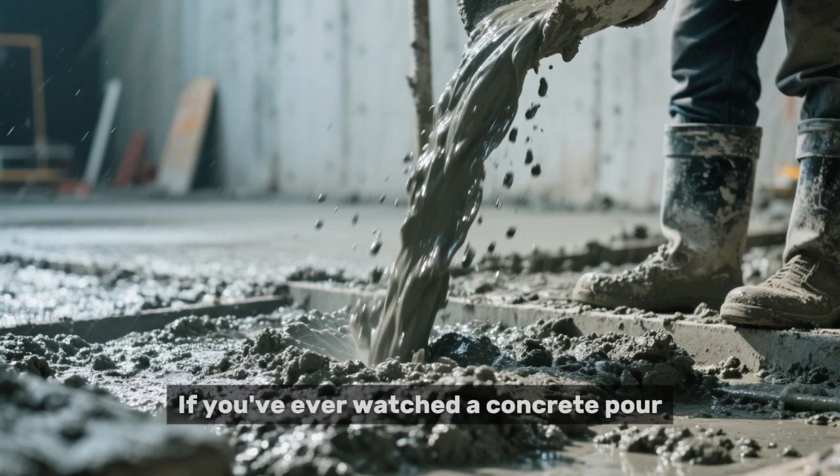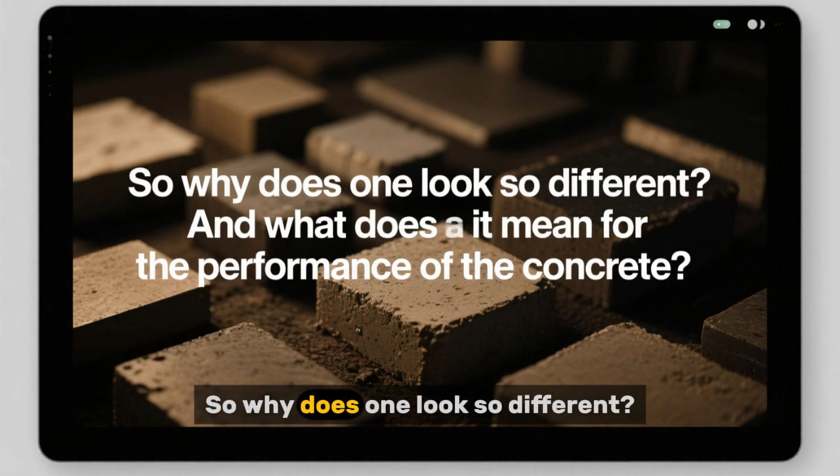If you've ever watched a concrete pour, you'd probably notice that some concrete looks like wet cement and others appears dry. But they're both at the same water to cement ratio. So why does one look so different? And what does it mean for the performance of the concrete?

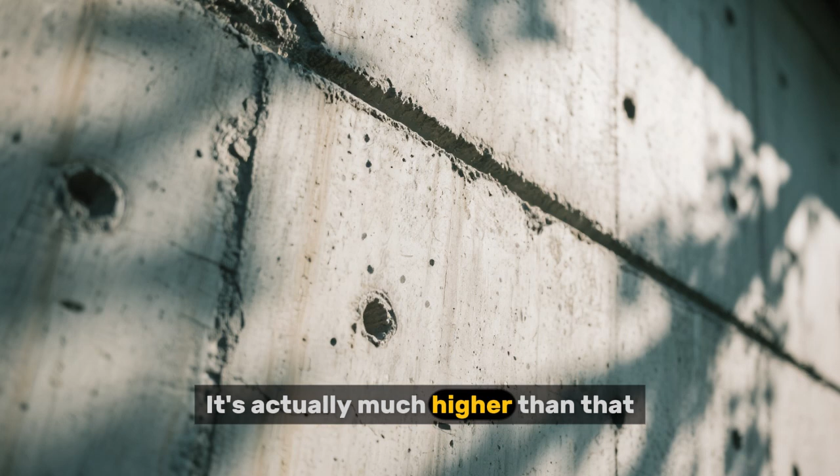I'm here to talk about the science behind concrete curing, which is something that I don't think people really understand very well. I've been involved with many projects where there's been problems with concrete, particularly with regard to cracking. And when you ask the contractor what was the water to cement ratio, they'll always say, oh, it was 0.45 or whatever it is, the typical ratio. But then you look at the concrete and it's clear that that's not the case. It's actually much higher than that. They just didn't understand it.

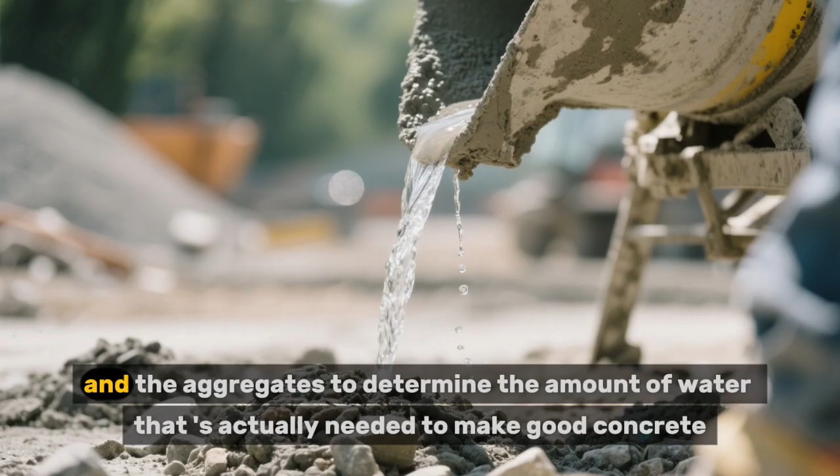And so it's important to understand the water to cement ratio, but also how that water reacts with the cement and the aggregates to determine the amount of water that's actually needed to make good concrete. Concrete without enough water will be difficult to place and finish properly. Too little water can lead to poor workability, segregation, and insufficient consolidation. On the other hand, too much water reduces strength and durability and increases the potential for cracking. Achieving the right balance between these extremes requires some understanding of concrete science and a whole lot of experience.

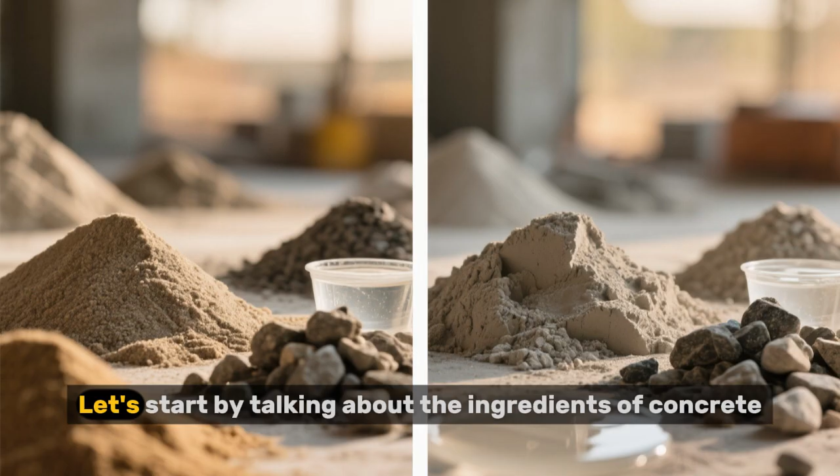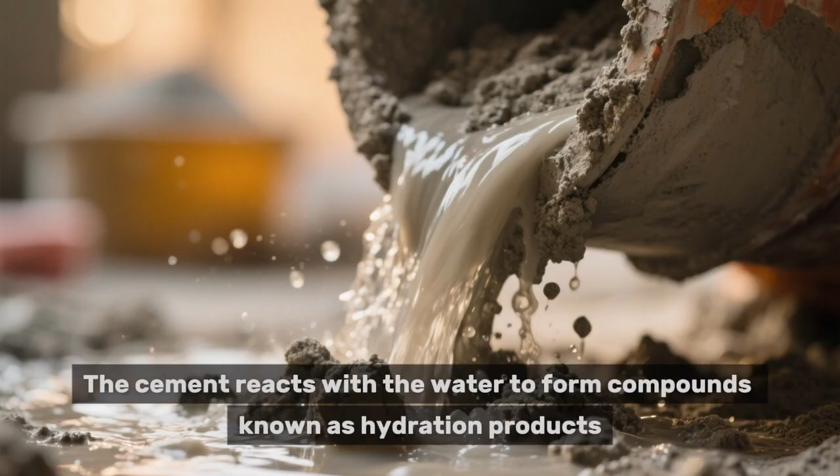Let's start by talking about the ingredients of concrete. Concrete is made up of 4 main ingredients: cement, water, aggregates (sand and gravel), and air. In order to make concrete, you mix all these ingredients together, and then once it's placed, a series of chemical reactions take place. The cement reacts with the water to form compounds known as hydration products. These products are responsible for the strength of the concrete.

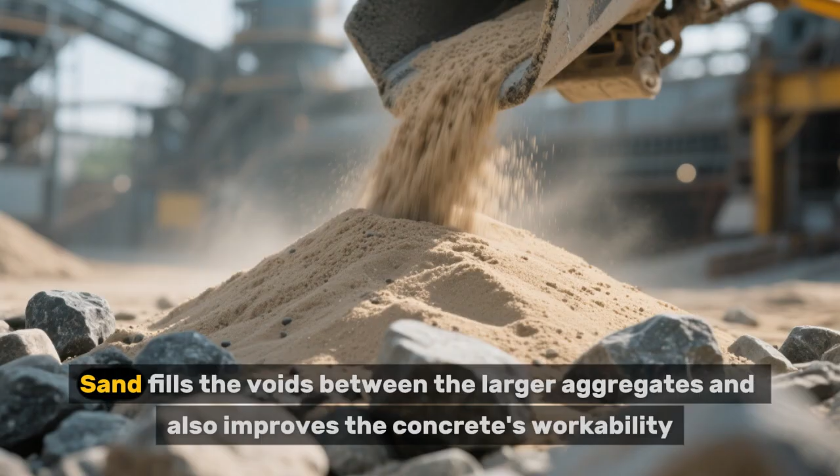The aggregate provides the bulk of the concrete's volume, and its porous structure allows water and air to be held within the concrete. Sand fills the voids between the larger aggregates and also improves the concrete's workability. Air is typically considered an impurity in concrete, but actually concrete without air is extremely brittle and is more likely to crack. The air bubbles within the concrete absorb some of the energy from applied loads and also allow for some movement within the concrete as it dries and shrinks.

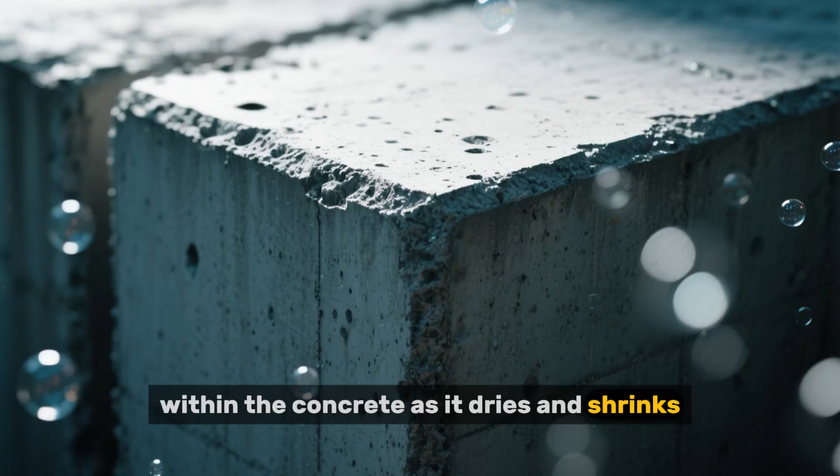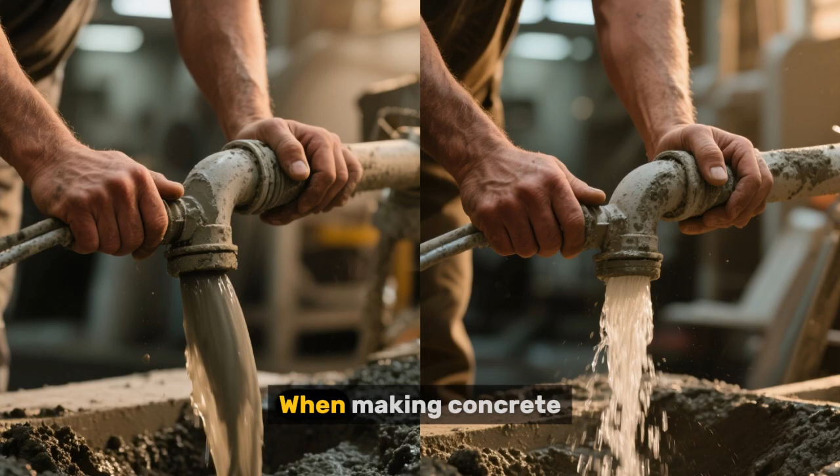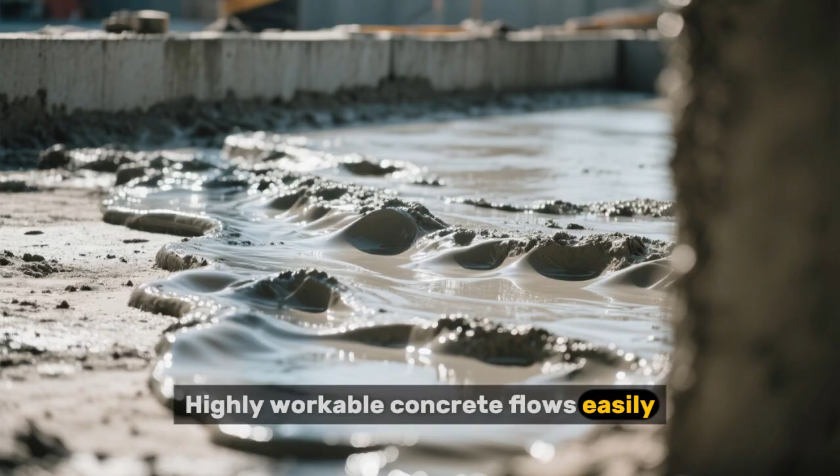One of the most important properties of concrete is its water to cement ratio, often abbreviated as W/C ratio. The W/C ratio is the ratio of the amount of water to the amount of cement in concrete. This ratio affects many of the properties of hardened concrete, including strength, durability, and appearance. When making concrete, you need to find the minimum amount of water necessary to make the concrete workable. Workability refers to a concrete's consistency or plasticity. Highly workable concrete flows easily and can be placed in congested areas with tight formwork. Less workable concrete is stiff and difficult to place.

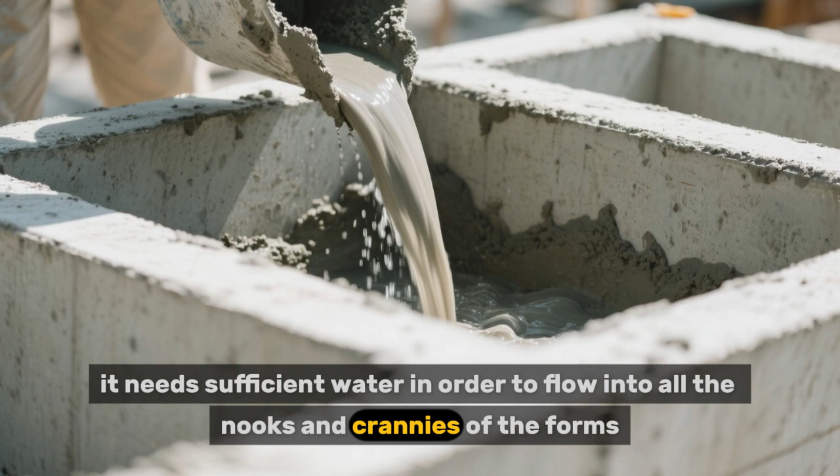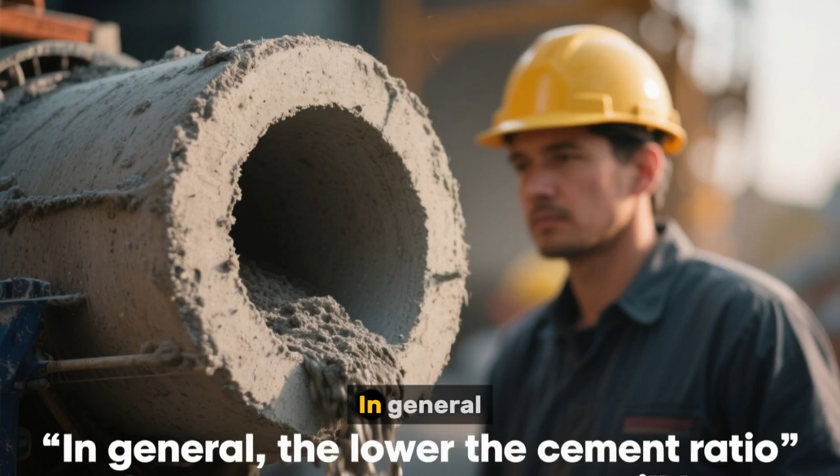Because concrete is a fluid when it's first mixed, it needs sufficient water in order to flow into all the nooks and crannies of the forms. If there isn't enough water, the concrete won't fill the forms completely and will be subject to segregation and may not consolidate around the reinforcement. The ideal concrete has just enough water to reach the furthest reaches of the forms and bind all the ingredients together. In general, the lower the water to cement ratio, the stronger the concrete will be. This is because the strength of concrete comes from the interlocking hydration products of the cement. With less water, there will be more cement available to react and produce a denser, stronger matrix.

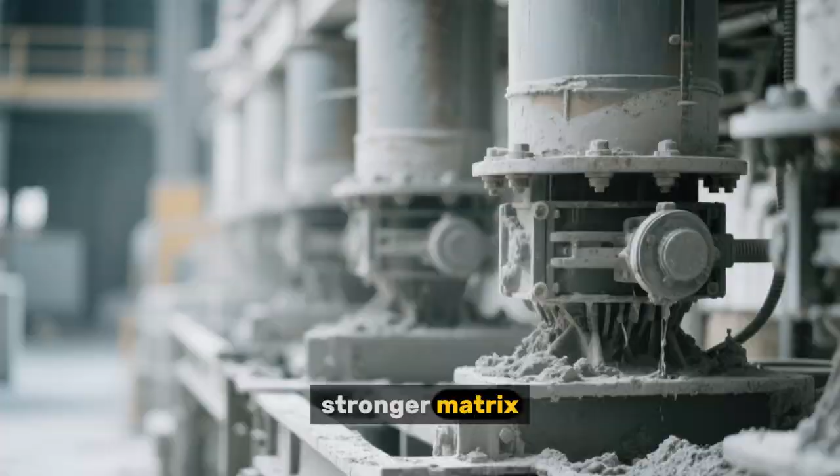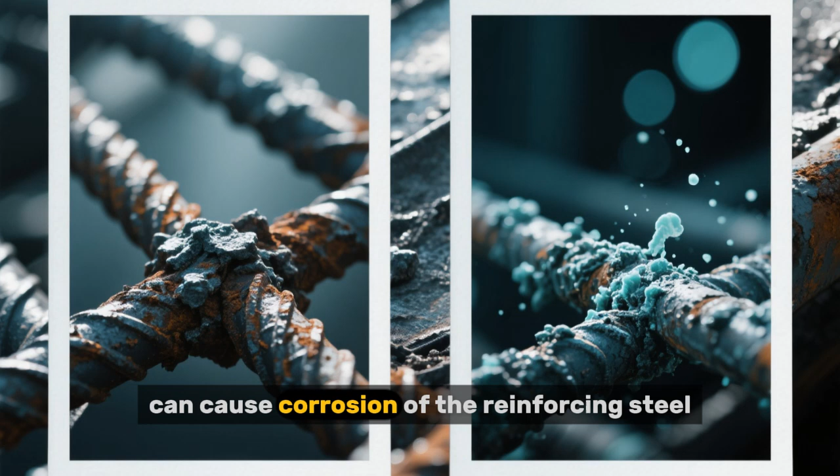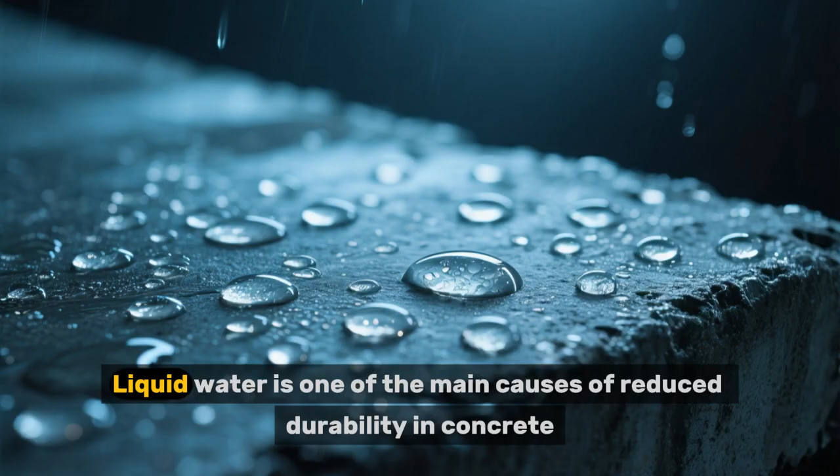Lower water to cement ratios also generally mean more durable concrete. With less water, there is less space for harmful ions to penetrate. Chloride ions, for example, can cause corrosion of the reinforcing steel, leading to reduced durability. Low water to cement ratios result in less permeable concrete, which means fewer pores and less surface area for water and other liquids to soak into. Liquid water is one of the main causes of reduced durability in concrete.

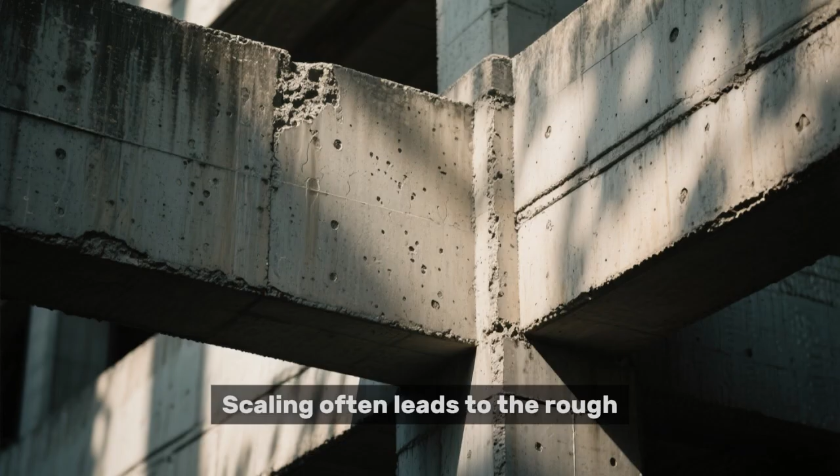Water can enter through the pores and freeze, expand, and eventually break apart the hydration products and the aggregates. When this happens, we call it scaling. Concrete that is exposed to freeze-thaw cycles, deicing salts, and other elements will eventually fail. Scaling often leads to the rough, pitted appearance seen in many concrete structures.

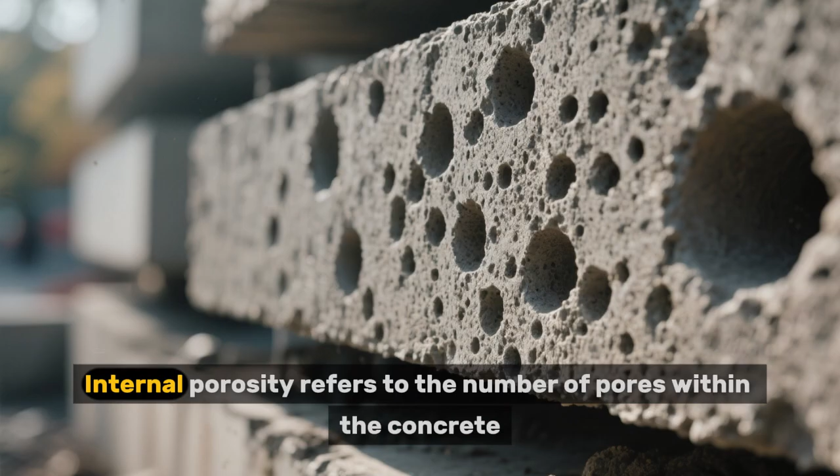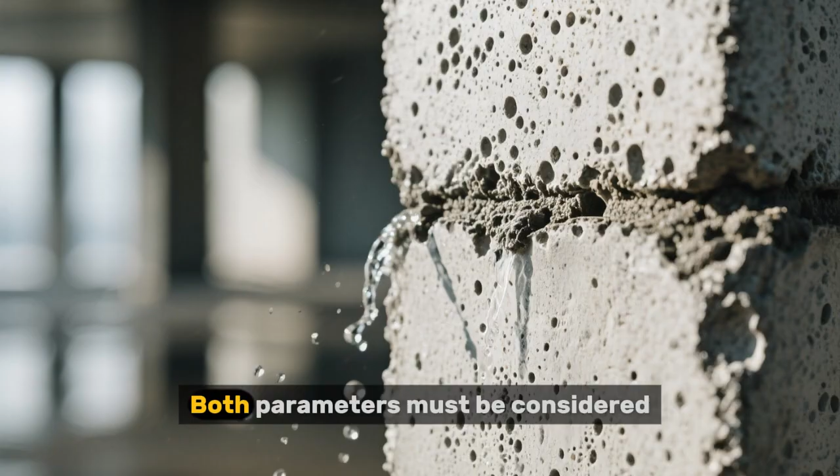Another way that low water-to-cement ratios improve durability is by reducing the amount of internal and connected porosity. Internal porosity refers to the number of pores within the concrete. Connected porosity describes the pore structure and whether the pores are large enough to allow water to travel through the concrete. Both parameters must be considered.

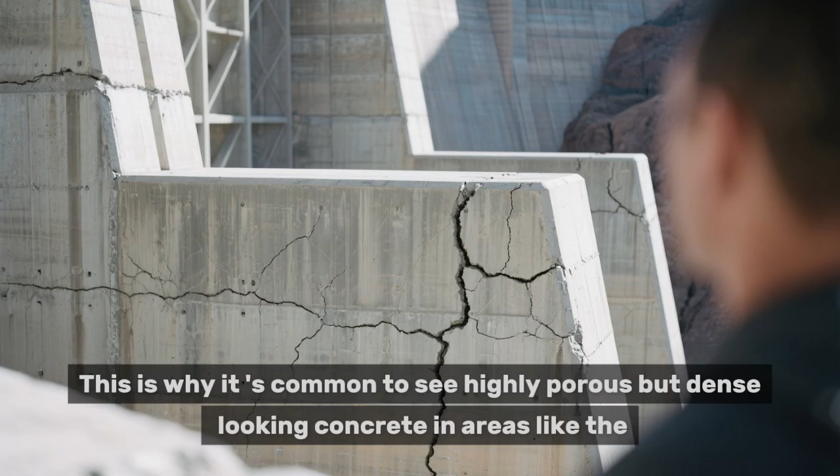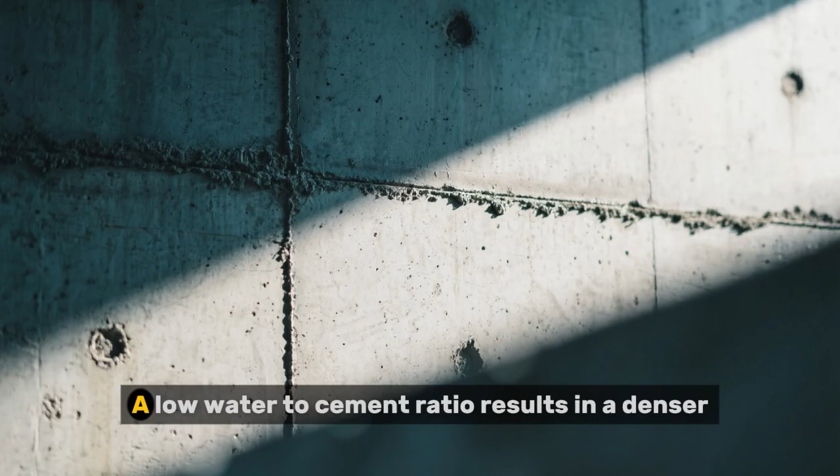A highly porous concrete with small pores is less susceptible to water penetration than a less porous concrete with large interconnected pores. This is why it is common to see highly porous but dense-looking concrete in areas like the Hoover Dam that have minimal cracking, while some of the newer concrete that doesn't look all that porous has extensive cracking. A low water-to-cement ratio results in a denser, more compact concrete with fewer pores and less interconnected porosity.

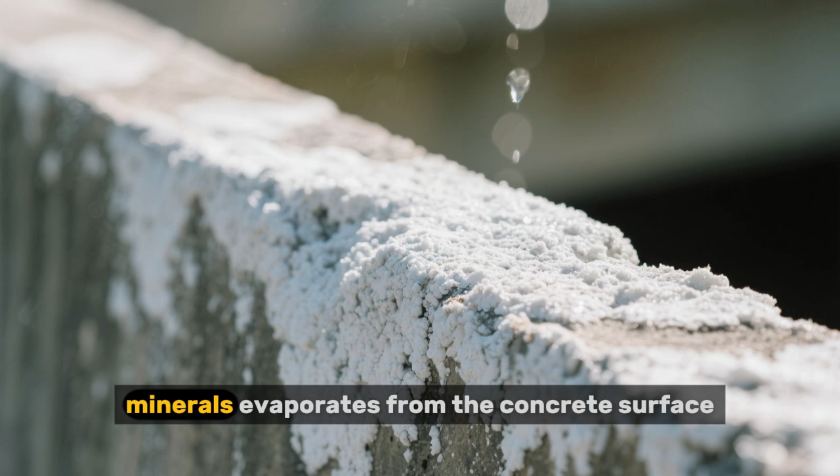In addition to improving strength and durability, low water-to-cement ratios also produce a more impermeable concrete that is less likely to show efflorescence. Efflorescence occurs when water carrying salts and other minerals evaporates from the concrete surface, leaving behind a white powdery deposit. While it's not structurally significant, efflorescence can be an eyesore and an indication of a lack of quality control.

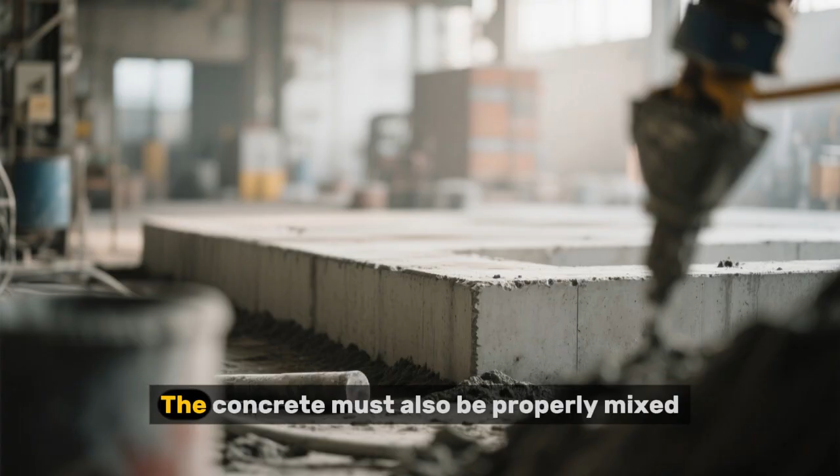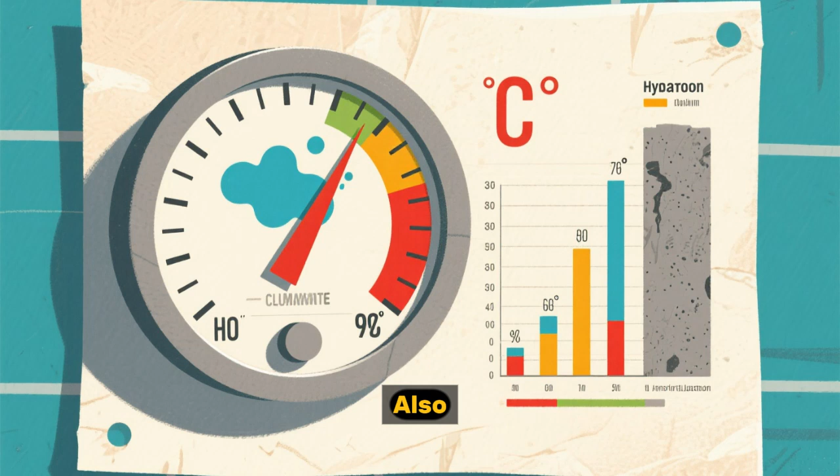It is important to note that achieving a low water-to-cement ratio is not enough to ensure a strong and durable concrete. The concrete must also be properly mixed, placed, and cured. Improper placement or curing can reduce the density of the concrete and increase the water-to-cement ratio, even if the mix design called for a low water-to-cement ratio. Also, factors such as temperature and humidity affect the rate of hydration and the amount of water required for proper workability. So how do we know what water-to-cement ratio to use?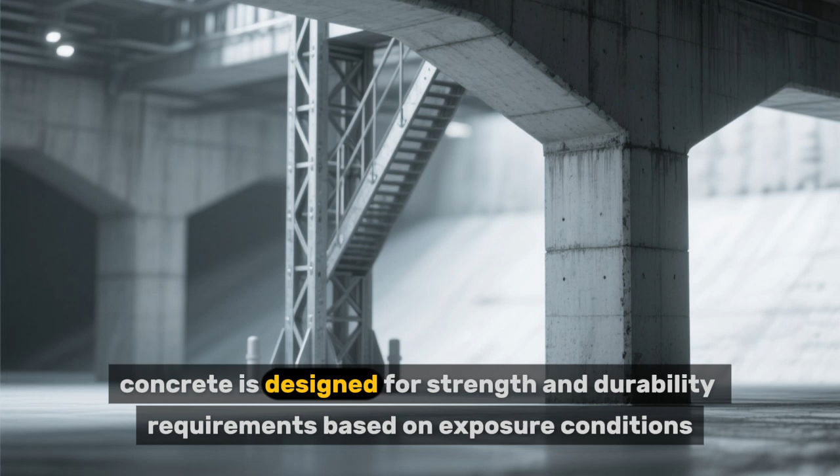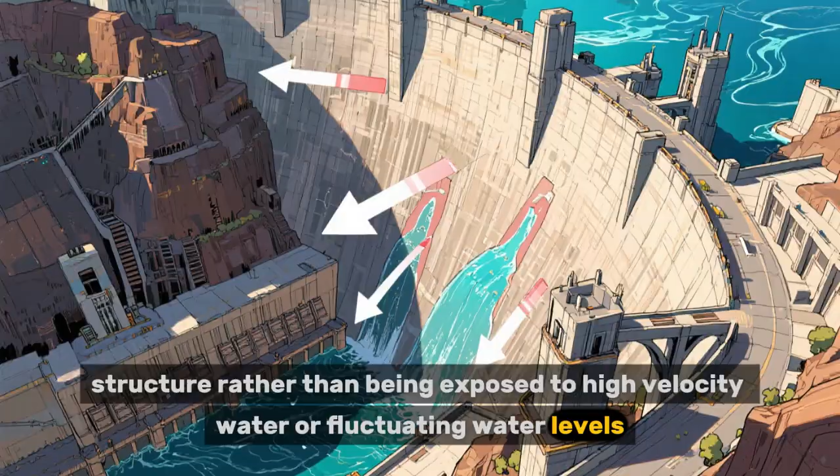Typically, concrete is designed for strength and durability requirements based on exposure conditions. For example, the exposure condition for the Hoover Dam was such that the concrete only needed to be resistant to water that would leak through the structure, rather than being exposed to high-velocity water or fluctuating water levels. Based on this exposure condition, a water-to-cement ratio of 0.45 was specified.

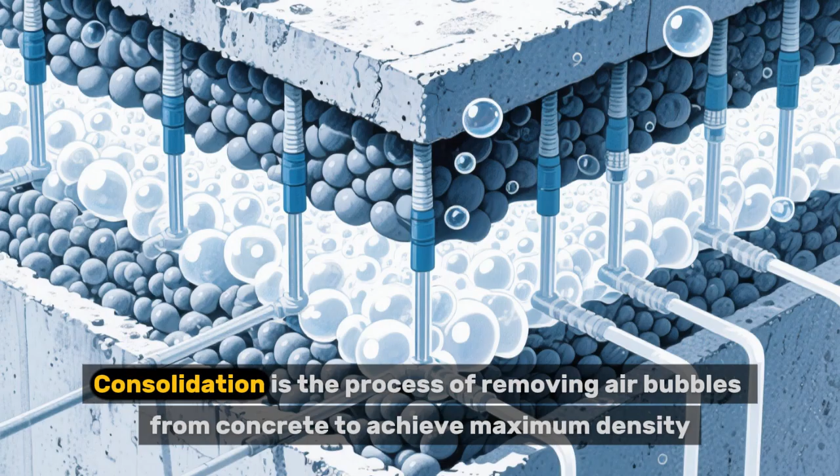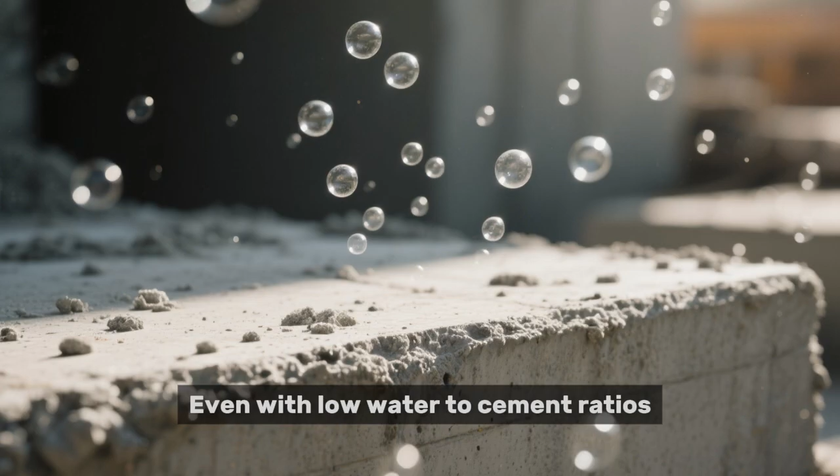For this concrete to perform properly, it had to be consolidated very well. Consolidation is the process of removing air bubbles from concrete to achieve maximum density. Without proper consolidation, air bubbles remain trapped in the concrete, which reduces its strength and durability. Even with low water-to-cement ratios, air bubbles can remain trapped in concrete, reducing its properties.

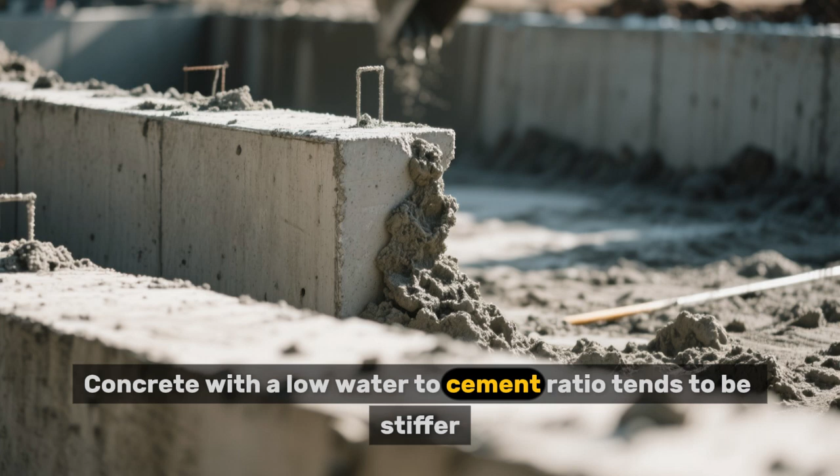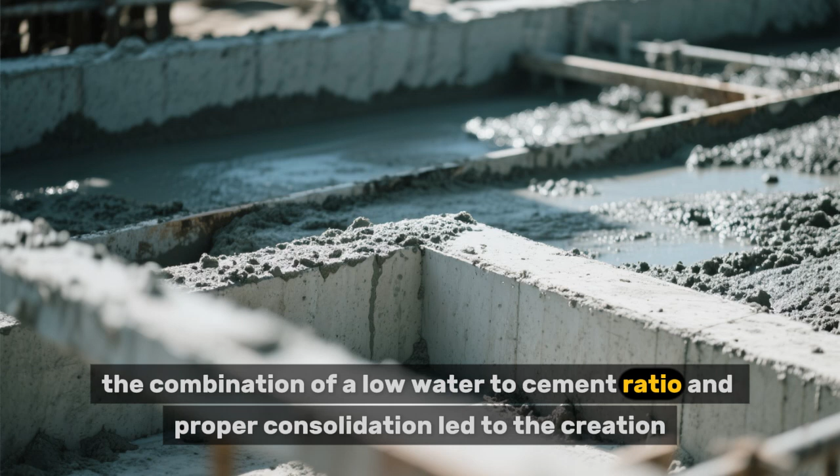The concrete mix used at the Hoover Dam was very stiff, which made consolidation very challenging. Concrete with a low water-to-cement ratio tends to be stiffer, which makes it more difficult to consolidate. To address this, special equipment such as vibrating heads and internal vibrators were used to consolidate the concrete. Proper consolidation was critical to the success of the project. Ultimately, the combination of a low water-to-cement ratio and proper consolidation led to the creation of a strong and durable concrete that has stood the test of time.

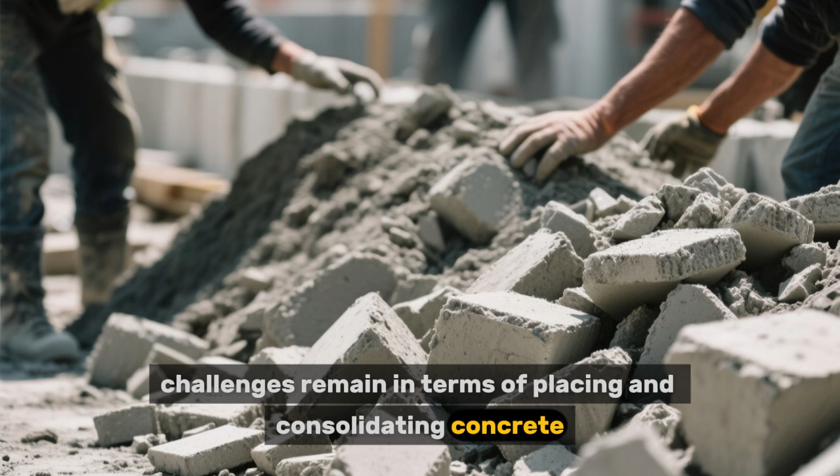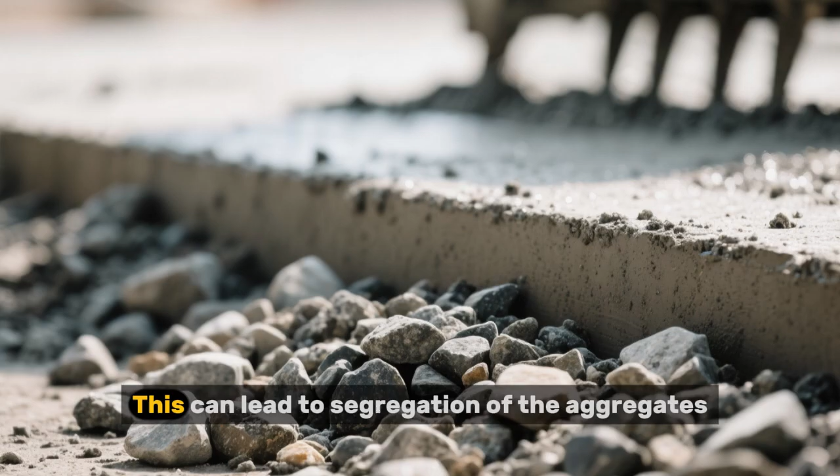Today, concrete is often mixed at a central plant where the ingredients are batched and mixed in a central location before being transported to the job site. This allows for more consistent concrete. Still, challenges remain in terms of placing and consolidating concrete, especially in congested areas or when there are difficulties with the forms. Placing concrete in congested areas can be challenging due to the difficulty in reaching all parts of the forms. This can lead to segregation of the aggregates, which can reduce the concrete's strength and durability.

In congested areas, concrete should be placed in layers, and each layer should be consolidated thoroughly to ensure proper mixing. This can be done manually, or with the help of mechanical equipment such as vibrators. Forms can also present challenges for concrete placement and consolidation. If the forms are not rigid enough, they can move or shift during placement, leading to uneven concrete surfaces or incomplete filling of the forms.

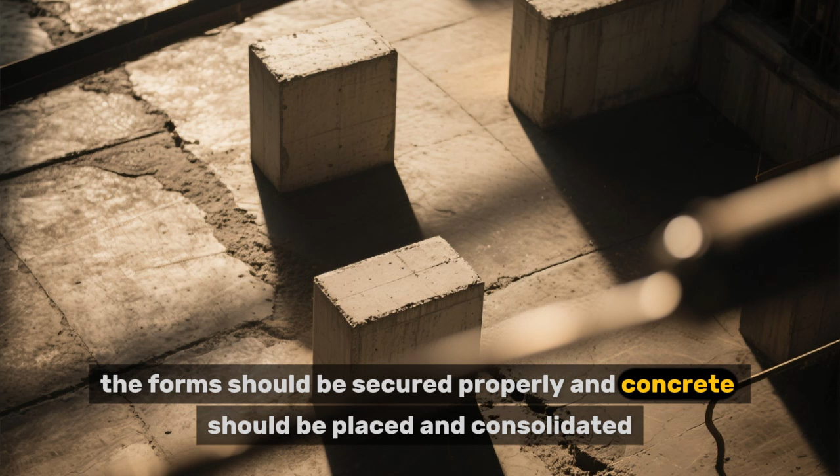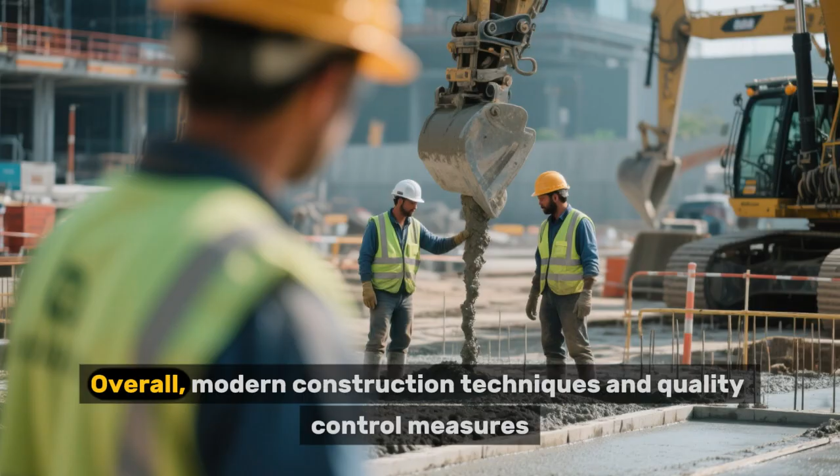In these cases, the forms should be secured properly and concrete should be placed and consolidated carefully to prevent any movement or settlement. Advanced techniques such as using pumps to place concrete have been employed in situations where traditional methods are not feasible. Overall, modern construction techniques and quality control measures have helped to mitigate many of the challenges associated with concrete placement and consolidation.